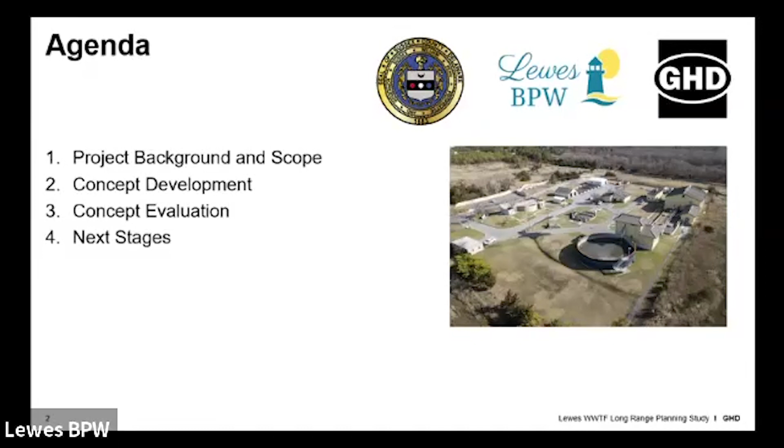So as I was saying, I'll talk you through the project background and the scope, talk you through the concept development, the concept evaluation, and the next stages as we see them. This is all information that's already in the report. So if you've already had a chance to review that, then this will be familiar. Just to interrupt, the slides and the report are actually available on the BPW website for anyone who wants to download them or follow online. So go ahead, Tom. Thanks.

I'll start with some project background. So as I'm sure you're aware, the BPW has the wastewater treatment facility here in Lewes, and it's located at a low elevation site close to the beach. And that site is vulnerable to sea level rise and flood damage. And the BPW, in discussion with GHD, is looking to evaluate options to mitigate that flood risk and/or relocate the facility entirely. Sussex County has an existing agreement in place with the BPW to transfer wastewater flows over to the treatment facility when demand is lower in Lewes during the winter months.

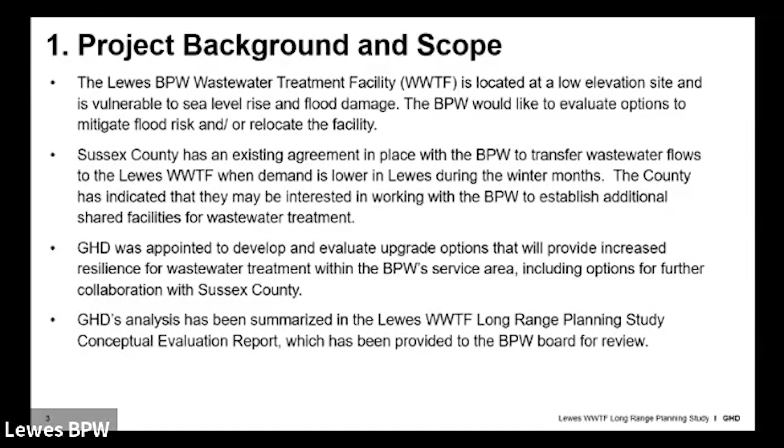And the county has indicated that they may be interested in expanding that relationship and working with the BPW to establish additional shared facilities for wastewater treatment. GHD was appointed to develop and evaluate upgrade options that will provide increased resilience for wastewater treatment within the BPW service area, including considering options for further collaboration with the county. As we've discussed, our analysis has been summarized in the long-range planning study conceptual evaluation report, a copy of which has been provided to the board for review. And I'm going to summarize the key findings today. If there are any questions at any stage, please just let me know. But if not, I'm going to the scope in a little bit more detail.

So GHD evaluated a total of 6 upgrade options to increase the resilience of wastewater treatment here in Lewes, specifically to stormwater events and sea level rise. The following options were evaluated. So option 1 was hardening of the existing wastewater treatment facility, maintaining the same site, providing upgrades required to the processes so that it would be suitable to stay in operation up to the project planning horizon of 2050, and also stormwater resilience upgrades. So looking at perimeter barriers, flood proofing of individual buildings, and on-site fuel storage for emergency events. So that's option one, focused on the existing site, increasing resilience.

The option two series of options all involve relocating the wastewater treatment facility to a high elevation site within the greater Lewes area. And they vary in the proposed discharge methodology. So option 2A would be relocation to a new site and discharge of treated effluent via land application, spray irrigation or RIBs. Option 2B would be the relocation, but transferring the treated effluent back to the existing permitted outfall on the canal here in Lewes.

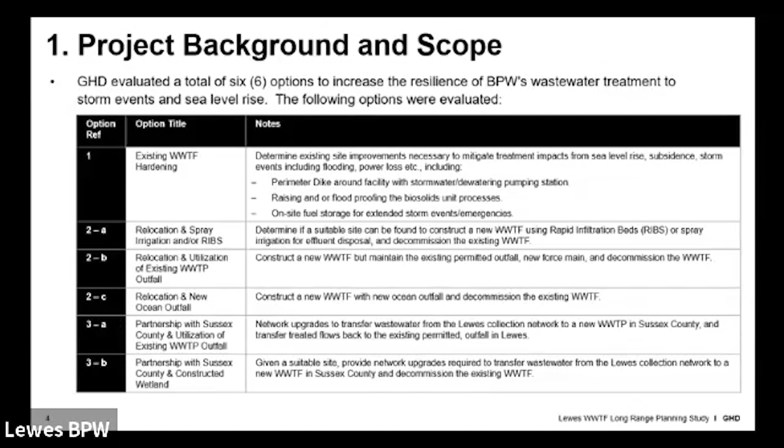So here we show the existing Lewes collection network split into the two subcatchments, so the northern network and the southern network, either side of the canal. And each one terminates in a lift pump station 8 and pump station 4 respectively. And those two pump stations transfer the raw wastewater to the existing wastewater treatment facility. And it's then discharged by the existing permitted outfall.

So at a conceptual level, option one would keep that basic network arrangement the same, keep the existing collection facilities and pump stations and the existing wastewater treatment facility site. But the works that would be required are really split into two categories. One are process upgrades, and the second is stormwater flooding resilience.

So because under the other option scenarios, we're looking at new sites, which would have to be designed to be operational up to a planning horizon of 2050. Under option one, in order to make it a like-for-like comparison, we looked at the process upgrades required to maintain the existing site functional up to that same planning horizon of 2050. And through going through the existing processes and the key equipment, we've identified that as part of these upgrades, the headworks facilities would need to be upgraded.

Thank you. And again, I'm just trying to understand the math. I know it's on a different page, on page 17 in the other one, but it talks about the 2015 FEMA 100-year flood site, 7 feet. I got that. But below that, it's projected 2050 and it shows 2.13. I assume that's in addition to the 7. Yes. So in less than 30 years, we would be in a position where it's not 7, but it's actually 7 plus the 2.13. Yes.

That's on the high end of the state's prediction for 2050, isn't that the case? Yes. We've used the high end of the curve. So if you remember the sea level rise curves, there's 3 of them. For planning purposes people typically use the mid-level, but for infrastructure or critical infrastructure, it's the high level curve. And is that the 2050 curve that's here, for the high level? Yes. Okay, thank you.

So yes, clearly a major residual issue with option one, which is picked up in the evaluation later, is that it's down in a flood prone area still. So even if we can make the site resilient, in the broader area there's still clearly going to be a major issue. Any other questions on option one before I get into option two?

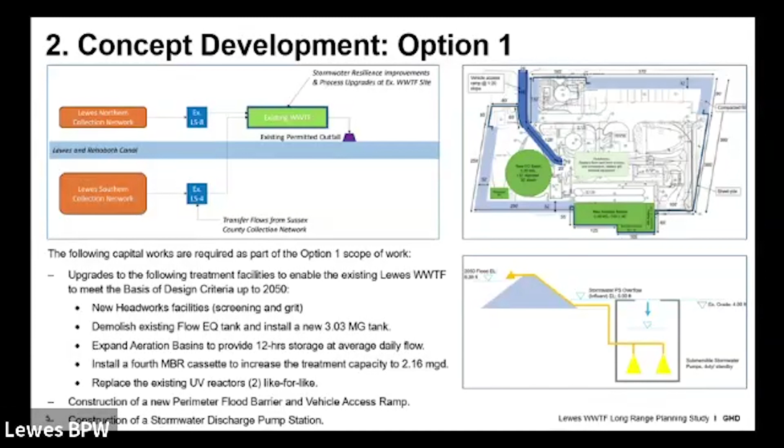Okay, so option 2A. And again, I'll draw your attention to the schematic in the top left. The collection network remains the same, split into northern and southern, but the flows are consolidated in a different way. Lift station number 4, which currently pumps directly to the wastewater treatment facility, would pump to the lift station 8 site, where a new upgraded pump station would be constructed to consolidate the flows from the Lewes collection network and then transfer them to a new site.

For the purposes of concept development, we've based everything on a new pump station at the LS8 site on the basis that the LS4 site is right in the center of the city. It'll be much more disruptive to do large construction there and much more visible to the stakeholders, whereas LS8 is at least slightly away from the center of town. From that new upgraded pump station, the combined raw wastewater flows would go to a new high elevation site, which would be an activated sludge site with effluent filtration. And under option 2A, the treated effluent would be discharged by land application via spray irrigation.

The other diagram that we're showing here on the right-hand side is a schematic arrangement, approximately to scale, showing what a new facility would look like. So we have a headworks building, the aeration basins, flow equalization basins, clarifiers, UV disinfection, effluent filters, and then the 4 large boxes you see there are specifically for the land application. Some of the regulations require 45 days of treated effluent storage, and then an effluent pump station to go to the spray irrigation facilities.

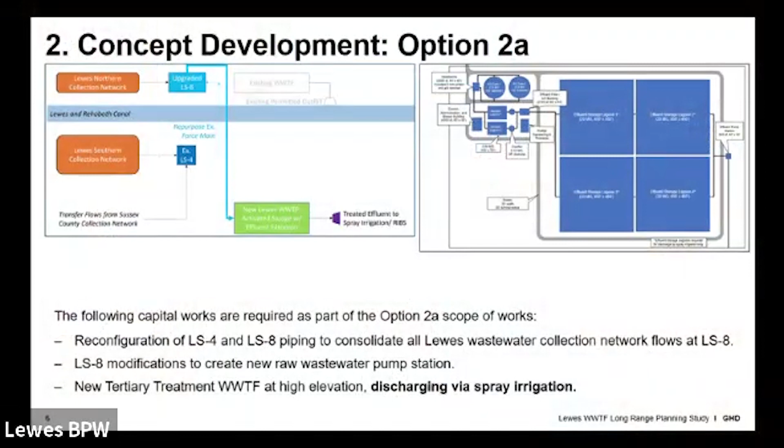Any other questions on 2A? So for option 2B, again, consolidate the flows in Lewes in the same way at an upgraded pump station number 8, transferred to a new high elevation site. And this time, rather than land application, there'll be a treated effluent pump station, which will transfer the flows back to the existing permitted outfall.

And the diagram I'm showing on this one is actually common to all of the option 2 and option 3 concepts. It shows a schematic arrangement for the new consolidated pump station at the LS8 site. So as Austin was saying, it's at the corner of American Legion Road and Savannah Road. The blue piping is the existing gravity mains that go into the existing pump station. And the concept is you could construct a new larger pump station offline with new force mains to and from, and then connect in at the last moment to do the majority of the work offline.

Any questions on this as a concept? This one increased the footprint in the floodplain. Yes. Okay. But the new pump station would be built to be resilient and higher and watertight.

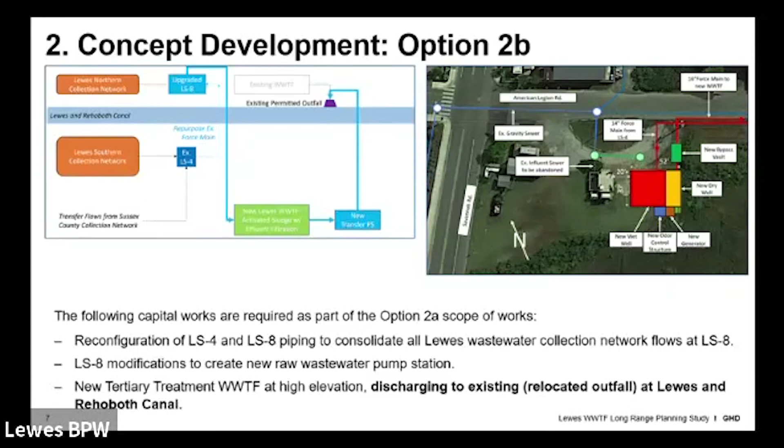Dock. And battery powered mowers. But they forgot to put the dock in, but that's cheap. Okay.

And then option 2C, again, the variation here is the means of discharging the treated effluent. So from the new high elevation site, there would again be a treated effluent pump station, but rather than going back to the existing outfall, we've developed a concept where there'll be a new ocean outfall. See the graphic on the right-hand side. You see a pipe coming in at the bottom left in green, past the existing treatment facilities,

and then going along Cape Henlopen Drive, which would go through the state park, but within an existing paved road until you get to the existing parking lot close to the beach, and then a new section of ocean outfall will be required. We've made an assumption that would be a 6,000 linear foot ocean outfall based on comparable systems in the region. Is that what Rehoboth has, roughly? Yes.

So would we still have to harden the wastewater treatment plant with this example? Pardon me? You'd still have to harden the wastewater treatment plant. No. So this is consolidating the flows up to a new high elevation site. Oh, okay, got it. All the 2s are a new site. Yeah, thanks. That would have to be constructed prior to the rest.

No, right. Don't give him the microphone.

Well, I also see that there's no county cost that's shared in that ocean outfall. I didn't notice that one in this structure. But our flow agreement allows that if there's any increase in capacity that would be dedicated, the county has the right to approach the board and pay for those costs.

And then on the land piece, just to clarify, we're looking at parcels. When we say 19958, you take your line of delineation as Route 1. You have east of Route 1 and west of Route 1. Huge difference in cost to acquire land. Yeah, sure, but still, where are you gonna find 250 contiguous acres? Oh, they don't have to be contiguous. You could have 50 acres over here and pipe it to it. Okay, that makes sense. Ideally, it would be one location. Yeah, okay.

This is option 2C. So clearly there will be a lot of challenges with getting an outfall like that constructed and permitted. But we consider it a technically feasible alternative, and therefore we wanted to include it so that we've got a good robust comparison.

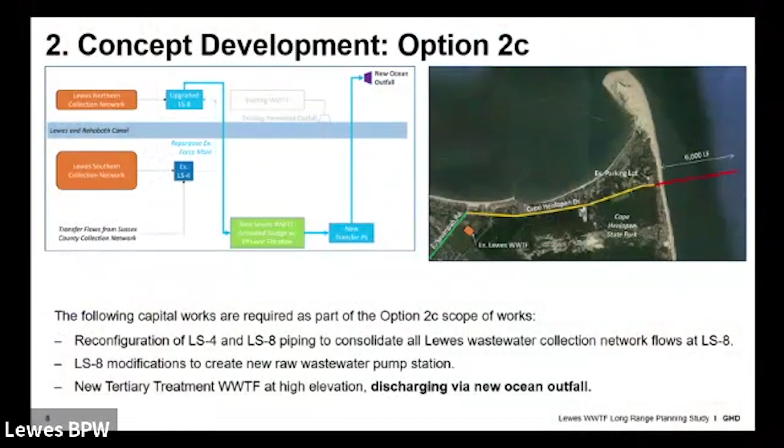Okay. Now we get on to the option 3 concepts, starting with option 3A. So option 3 involves a partnership with Sussex County. Again, I'll start by talking you through the schematic in the top left. As with option 2, we consolidate the Lewes flows at an upgraded pump station at LS8. And this time it would pump to a new shared facility, a city-county new wastewater treatment facility to be constructed at the Wolfe Neck site.

Now, a key aspect of these arrangements is the BPW Sussex County boundary, which is shown indicatively on that diagram. Under the terms of the existing wastewater transfer agreement, there is a defined scope boundary, and each party pays costs for new infrastructure either side of that boundary. And that really comes into it in terms of the responsibilities for the costs.

Tom, can I just clarify one thing? You said shared facility. It's going to be a county facility. We wouldn't share the ownership. We would share the use. Correct. Absolutely a very important point. So it'd be a facility used by both. Yep. County owned. And just to add on to that, under option 2, they would be BPW facilities with shared use with the county. Option 3 would be county facilities with shared use by BPW.

Okay, but let me run you through all the works that we've included in this option. So it's split into 2 categories. The BPW responsibility in terms of the capital works would be the new raw wastewater pump station, where we have the consolidated flows from the BPW network, and a portion of the raw wastewater force main from the pump station to the existing agreed scope boundary, which is at the intersection of Rhodeline Avenue and Guildford Road. And the rest of the works would be the county's responsibility.

That would include the rest of the raw wastewater force main from the scope boundary to the Wolfe Neck site, a new combined wastewater treatment facility, obviously the major ticket item, the treated effluent pump station, and the treated effluent force main from Wolfe Neck to the relocated outfall. The relocated outfall is located very close to the existing scope boundary, and therefore the county will be responsible for the full length of the treated effluent force main. And then, as indicated on the schematic, the existing outfall will be relocated at the same point in the canal, but on the opposing bank.

And the other diagram we're showing here is an extract from the county's GIS, which shows existing piping. So the red line at the top is the existing transfer pipe, which the county uses to transfer flows to the BPW treatment facilities. Under option 3A and option 3B, this would be replaced with a new raw wastewater pipe going in the opposite direction. It would then connect into the county's existing grid, where we're indicating the 16-inch force main, and then work its way through existing piping via the 30-inch force main to the Wolfe Neck site.

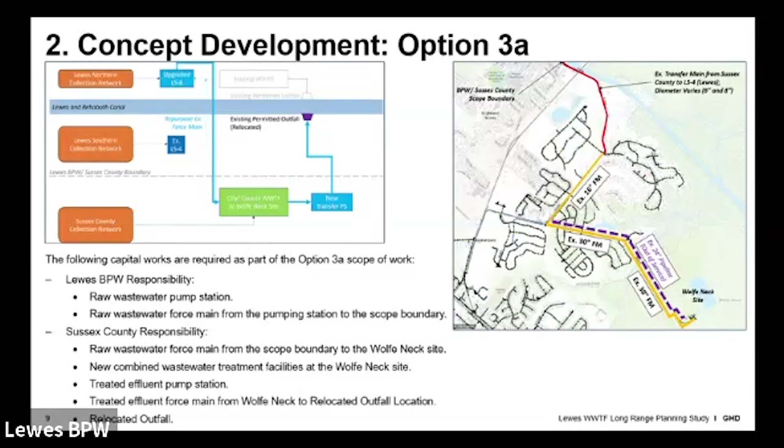And I apologize because I only got through a small portion of this because of some personal reasons. As it relates to our permit, we are very much below the standards in our permit. We are better than our permit. How does the county come up on that point? So we've included some analysis in the report, which indicates, with the increased flows, how best to explain it? We've demonstrated that with the type of treatment process that we're proposing, with the existing permit limits, you could increase the flow and still meet the permit limits. Does that answer your question?

No. So in 3A, if you look at our standards, what goes through the outfall pipe, and you look at the standards of what goes through the pipe for the county, if that was coming from the county versus from us, how much different is the effluent that's coming out of the pipe? You're not talking about volume, you're talking about quality of it. Both. Nutrient loading. Yes, because if the nutrient's higher and there's more coming out, there's a doubling effect. Yeah.

Our approach here was that the current facility that Lewes has a waste load allocation for nitrogen, phosphorus, BOD, TSS. And so for the flow for 2050, the plant currently has a capacity of 1.5 million gallons a day. For just the city of Lewes, we looked at the build out for the city, and we realized that was going to be needing 1.75 MGD. So we included a capacity of 1.75 MGD. Every lot was taken. Yes, I got it.

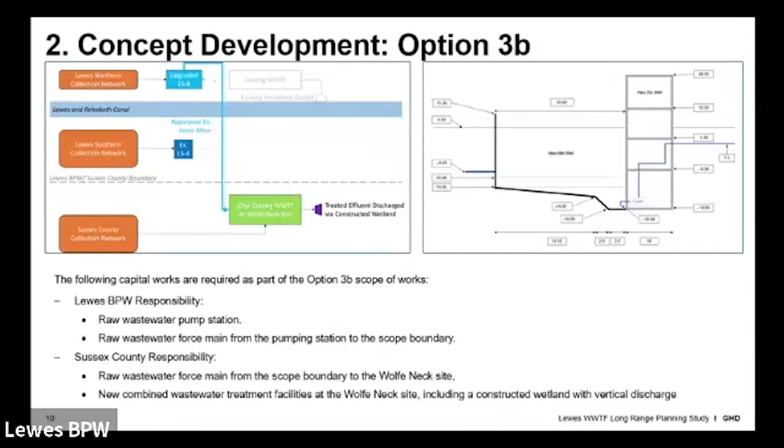So one key thing that you probably should bring up is on option 3, regardless of the treatment, it's also discharging on the outgoing tide only, which is different than we're doing now. Right. So we're not retaining the amount of flow in the canal. So it allows for better flushing of the canal. Right, I understand.

Hans, correct me. Mr. Chairman, just for the record and the public, not only the outgoing tide, but also the study and the county committed to a new, more in-depth canal study, which we've been discussing with DNREC. So that's another major factor of improving quality in the canal, regardless of 3A or 3B.

The constructed wetland, you still would only be discharging at, well, you have to have some minimum discharge to keep the wetland vibrant, but the wetland is a vertical discharge. Any other comments, questions on option 3B or option 3 overall, or any of the other concepts before we get into the evaluation? No.

Okay, so that's an overview of the concepts themselves. Now I'll talk you through the evaluation process. The evaluation really has two major components: one is cost and one is non-cost criteria. I'll start with the non-cost criteria. We've developed a multi-criteria analysis, or MCA, to evaluate each of the concepts based on a series of non-cost criteria. I have the tables prepared to take you through each of those. We developed a series of criteria, and then assigned each criterion a weighting to reflect its relative criticality. So not all criteria are equal.

And is that weighting just based on your experience of doing these? Yes, and essentially our perception of the key goals of the project. Again, I'm happy to take you through individually. But as a general approach, long term impacts to the community, water quality issues, resilience of wastewater treatment are generally assigned a higher weighting. Shorter term impacts, such as disruption only during parts of construction, or permitting complexity, we assign a lower weighting, because whilst there'll be some short term pain, in the longer term you can move past them.

So the weightings work from 1 to 3, and I should have mentioned under the MCA, a high score is good. So more points means a more favorable concept. The most critical items like water quality get a 3, and some of the shorter term impacts get a 1. So they're still part of the analysis, still considered, but it's a way of better reflecting the priorities of what we're trying to do.

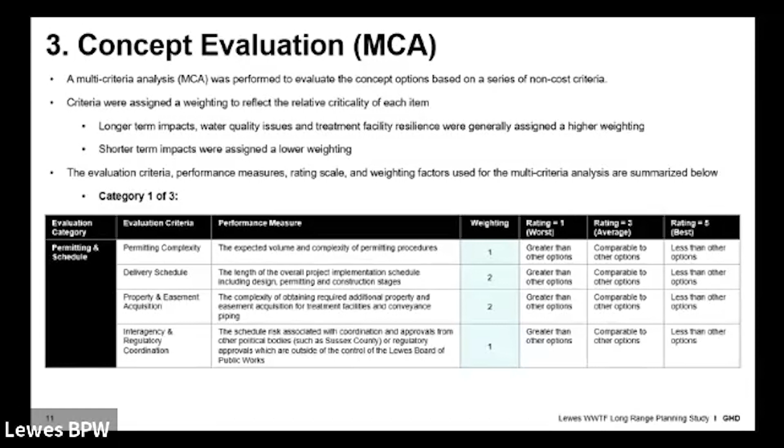So the next category is community and environmental impacts. And within that, we looked at stakeholder impacts during the construction stage, so temporary impacts; stakeholder impacts long-term, so the long-term impacts to the community due to, for example, traffic, odor, and other factors; water quality impacts for the inland bays, so the likelihood that the proposed treatment process would negatively impact the water quality of the inland bays. And this is one of the highest priority categories, gets a weighting of 3.

Overall environmental risk, again, a very high priority. So the likelihood of environmental impacts due to failure or flood damage at the treatment facilities or any of the associated facilities. So this is where the residual risk associated with option 1 really comes into the scoring. We looked at sustainability and energy and chemical use and land use within the city of Lewes. Any questions here?

And the third category is operation and maintenance. So within this category, we have impact to the treatment facilities' operations during the construction phase; operational complexity, so the level of operational effort required to maintain treatment performance and the difficulty in obtaining qualified staff and resources. And that was identified as a very high priority evaluation criteria, so it gets a 3. And future flexibility, so the extent to which the proposed treatment and conveyance facilities can be adapted to meet the future environmental and compliance conditions.

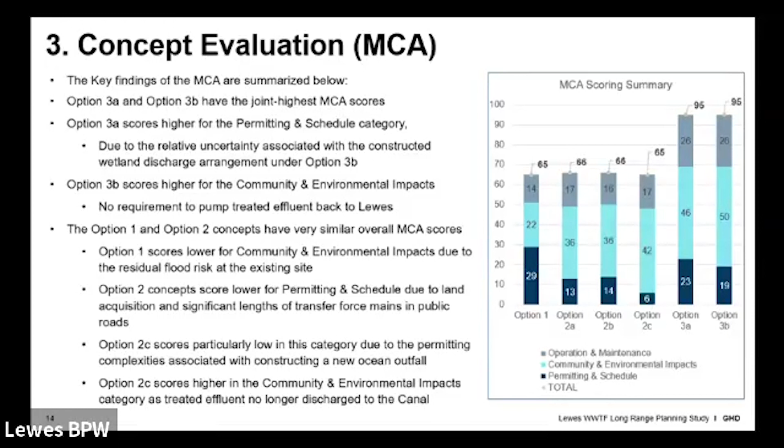And when we came up with the cost estimates, they have 2 components. One is the capital cost estimate to construct the new facilities, and the other is the 2050 net present value operation and maintenance cost. And in order to do this, we've estimated the operation and maintenance cost, the cost of equipment replacement, energy and chemical use that would be required up to that 2050 planning horizon with an allowance for inflation. And the aim here is to give you an idea of the total cost of each one of these concepts up to that 2050 planning horizon.

And then we combine the two, so the initial capital cost plus the total estimated net present value of the O&M costs to give a project life cycle. And again, that's the total costs to the BPW. So working through them stage by stage, capital cost estimate for option 1, which is hardening the existing site, allowing for contingencies and other uplifts. We have that at 23 million.

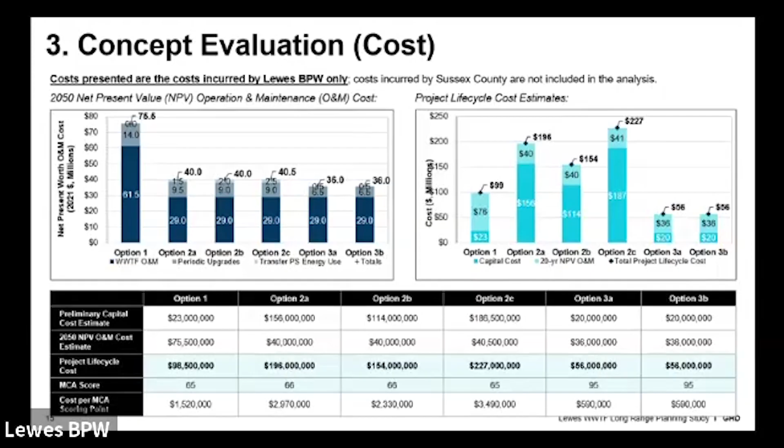An important point, I'd just like to clarify. Go ahead. Just a final point to clarify. The report doesn't include recommendations. We've presented analysis, and based on this analysis, this indicates that it's the best value for money. But at this stage, there isn't a recommendation or a preferred alternative.

Going back to option 1, capital cost is 23 million. Is that cost for the upgrade needed in the plant to go to 1.75 million gallons per day, and then also the pump stations and so forth? Yes. Okay. And the sheet pilings and the perimeter barrier. Yeah, but the plant cost is what I want to make sure is in there. It does assume additional cassettes, one additional to bring it to 4. Yeah, well, 4 trains. Yes. And an additional oxidation ditch.

Okay. Does 3A and B include dismantling the plant? Yes, we've included decommissioning costs in all the option 2 and option 3. Thank you.

Piggyback on the question Earl asked before, and this may be separate in terms of rate, like the volume, does that mean that the rates should go down because you're sharing in the costs and you're having more volume? So do we have an indication how this will affect the payer rates? Or will it have the opposite effect because you're taking it farther away?

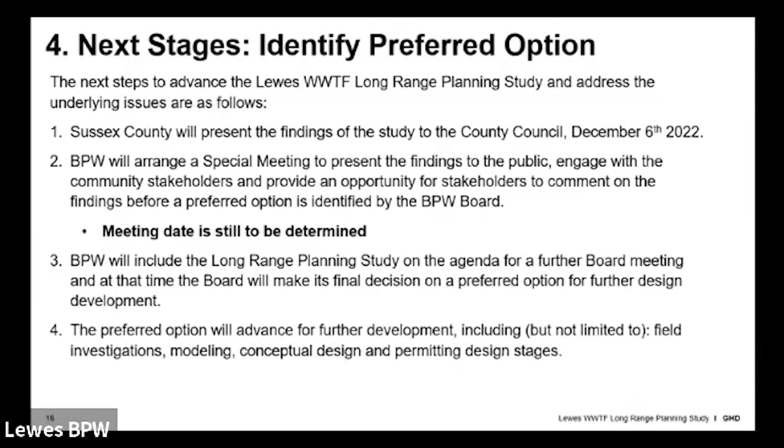That's what we have. Thank you very much. All right. Thank you. Very well done. So I really want to thank the entire GHD team; they have been phenomenal. It's taken a lot of work to get us here. And the amount of detail and the patience that they've had has been phenomenal. This is a great document. It's something we really needed and it was done well. And it's backed up by facts and not just guesses. So thank you.

Okay, let's move on to.

So, open forum general discussion on a date to hold a public workshop on this topic. So I don't think Pete wanted to comment. Yeah. No, he's fine. Hi, Mike, you still there? I'm still here. No, Pete was ready to take my place, but since we're just setting the meeting, let's press forward and I'll stick around.

Okay, so Austin, do we have any proposed dates? The only thing I'll tell you is, Tom, do you want to let everybody know when you're going to be out of town? Yeah, so I'm available up until the 15th of December, but then only after the 20th of January. So I'll be away out of the country for a while. Not for recreational reasons, immigration related. So I'm available to support a public meeting up until and including the 15th of December. Otherwise, it would need to be after the 20th of January for me personally to be involved. And Pres, you're leaving on the 24th of January. Yeah.